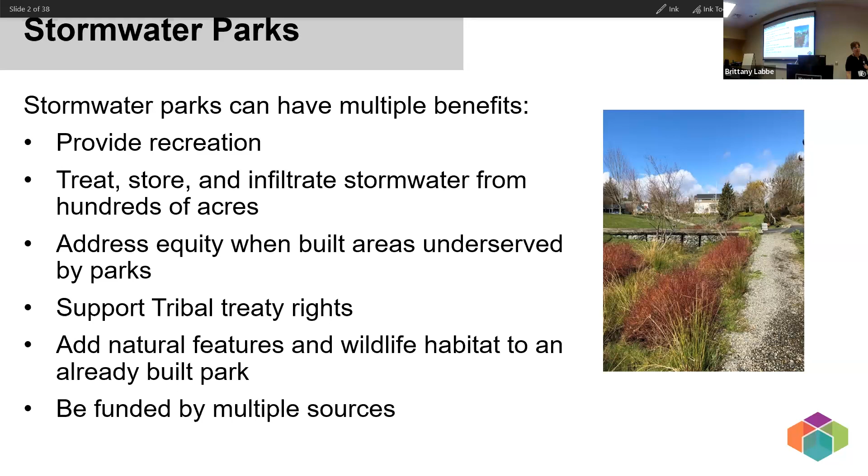So why stormwater parks? They have a lot of different benefits. You can add recreation to an area, you treat and store your stormwater. You can address equity if they're in an area that has a gap in your parks plan in terms of equity. They can support tribal treaty rights in that they're working on making receiving waters higher quality. They can add natural features and wildlife habitat, and they can be funded by multiple sources, which is always important.

And so again, the Puget Sound Regional Council has been working on stormwater parks. One of the ways they've done that is by getting a grant from the National Estuary Program to work with specific cities on stormwater parks by offering them technical assistance, and then by producing a guidance document, and also by producing a wonderful website that has lots of examples and resources.

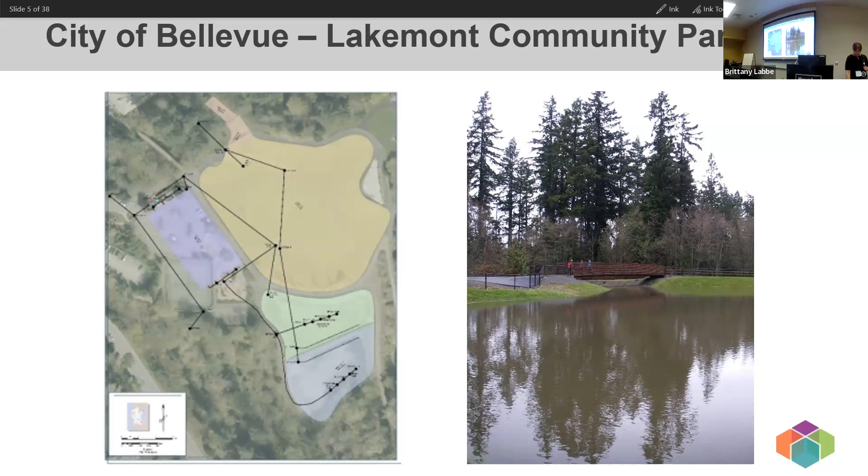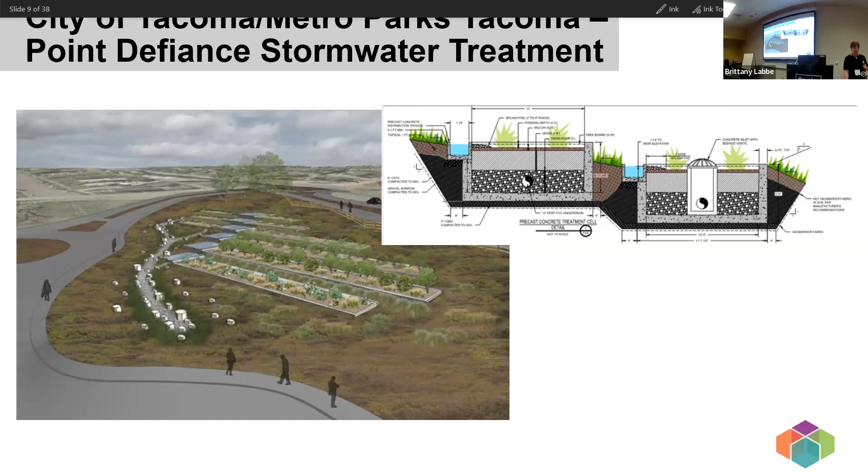Okay, so then these next slides, again, I'm going to zoom through these. So with the National Estuary Program grant, they chose cities from around the region and had them work with AHBL to get technical assistance. And that could be whatever the city wanted and needed that they felt would help move a stormwater park forward.

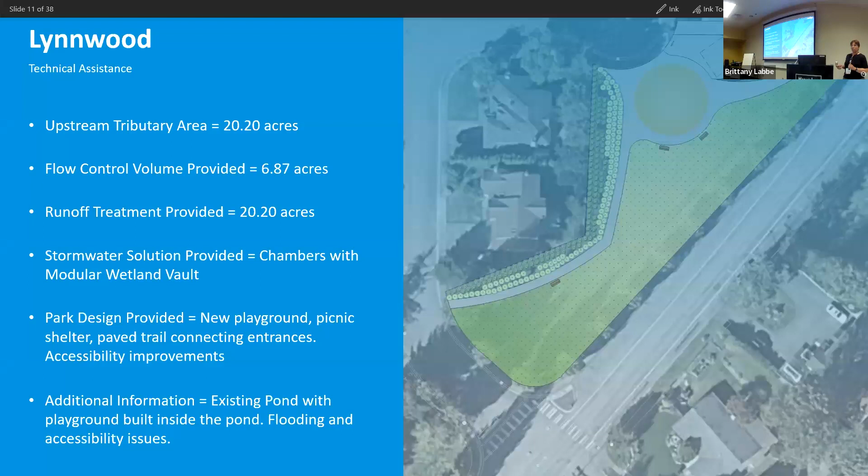And so, again, I don't feel that we have time to go through all the different details of these, but it gives you some flavor. The city of Lynnwood did an above ground facility, and they designed a park that had a new playground. So they got mostly design and sort of landscape architecture type assistance with their project. City of Marysville got sizing of their runoff treatment.

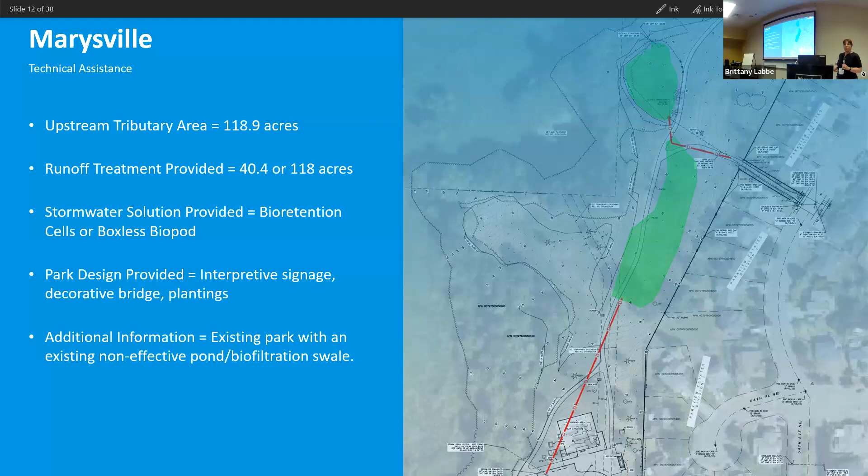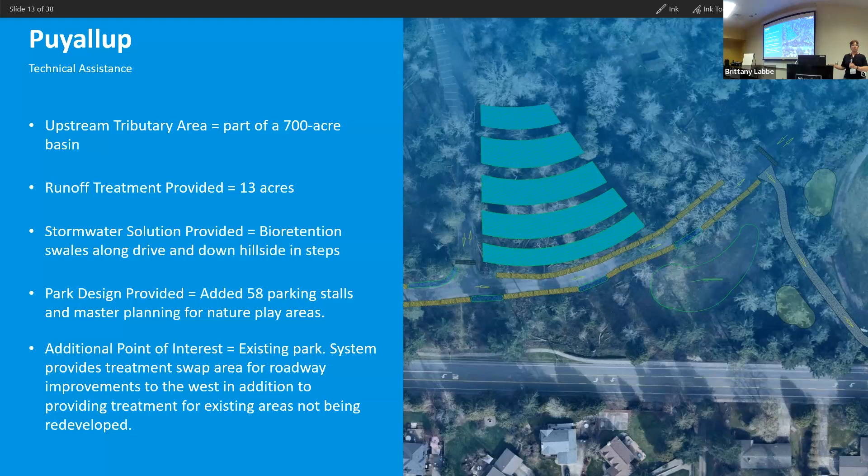Bioretention is what they chose to do. And then again, help with the park design portion of the project. City of Puyallup took part of a 700-acre basin and again developed some runoff treatment and got help again with design and putting just a something that they can then take forward towards construction and use in their public outreach. So

Woodinville, same sort of thing. There's a park that is right next to the Sammamish River, and they took an existing sort of underused tennis court and put a facility underneath that. And then again, we got design assistance and a good layout that they can then take forward.

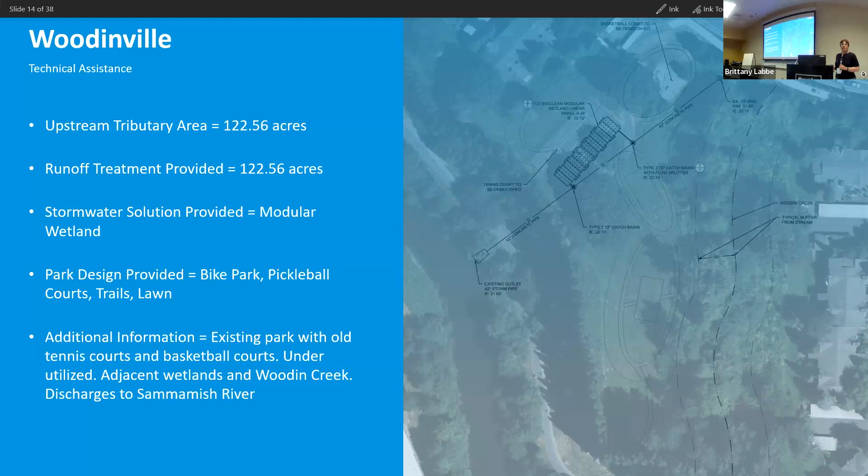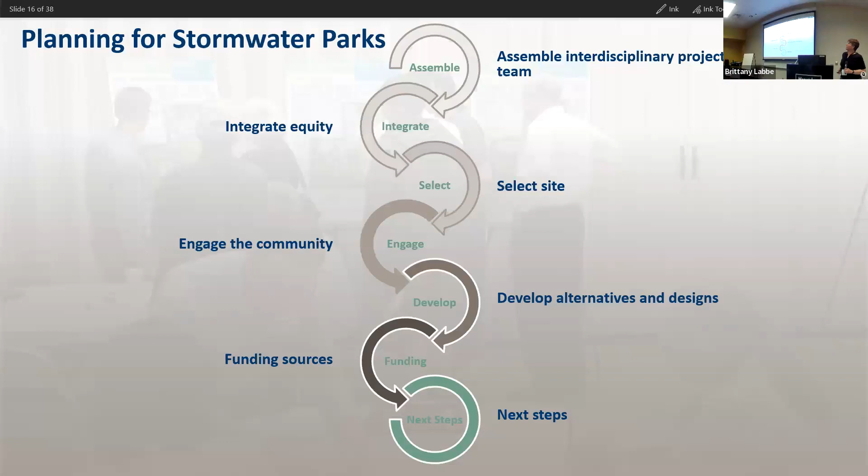So, okay. And this is the planning process, and wanted to talk about the guidance document. Again, this is available on the PSRC website, has lots of really nice tables about the types of recreation facilities you might want to consider, the types of planning collaboration that will help move your project forward. So lots of really good information collapsed into one place. So I definitely suggest that you take a look at that.

Okay, so moving on to Kirkland. Again, we participated in this grant project and proposed to use the North Rose Hill open space, which the first thing it needs is a better name. It was an open space that was in the Parks, Recreation, and Open Space Plan. And it was an identified gap area in our PROS plan. So the Parks Department said, we need a park here. And there was a citywide trail connection that goes under. There's a power corridor that runs north-south, and there was a desire for a connection through this parcel.

From the stormwater part of things, we had done retrofit planning in this area with Jacobs and had identified this as a site. It drains to Forbes Creek. We have flooding issues and water quality issues. The upstream area is all residential area that's not likely to redevelop in a way that will require stormwater treatment or flow control. About 18 acres drained to there, and the soils might infiltrate. And to top it all off, we had a storm line that currently runs through the park that was in terrible shape that needs to be replaced anyway. So from a stormwater perspective, there are a lot of reasons why it was a good idea.

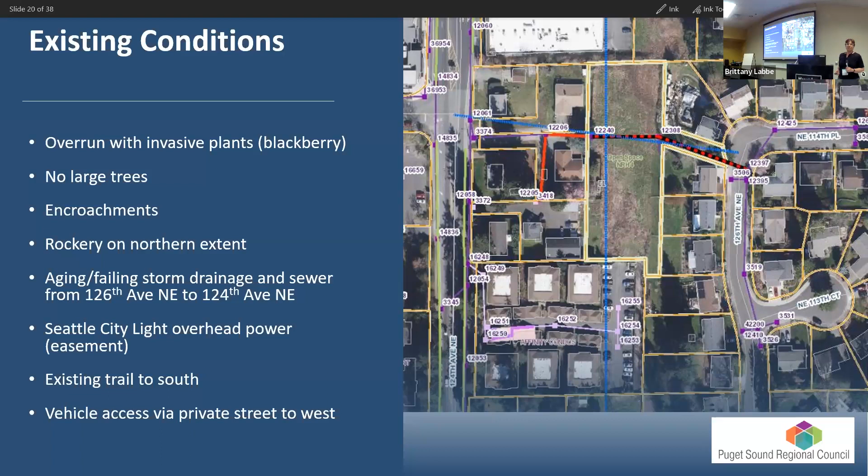So it's basically a blank slate. Here's what it looks like now. So not a lot of ways you can go down here. So a lot of ways you can go up. So we thought it was a good opportunity. And so what we asked for from AHBL was geotech. What I have found in retrofit planning I have done in other parts of the city is the more you know about your soils earlier, the better off you are.

We started off with this site thinking that infiltration would be great. The early geotech work showed us that infiltration was not feasible. So that was really helpful. That pointed us toward bioretention. We also asked for some topographic survey just to know where those encroachments are and get the lay of the land. And then we asked for some preliminary engineering and some landscape design and a little bit of cost estimating so that we could move it forward through grants and or through the parks planning process.

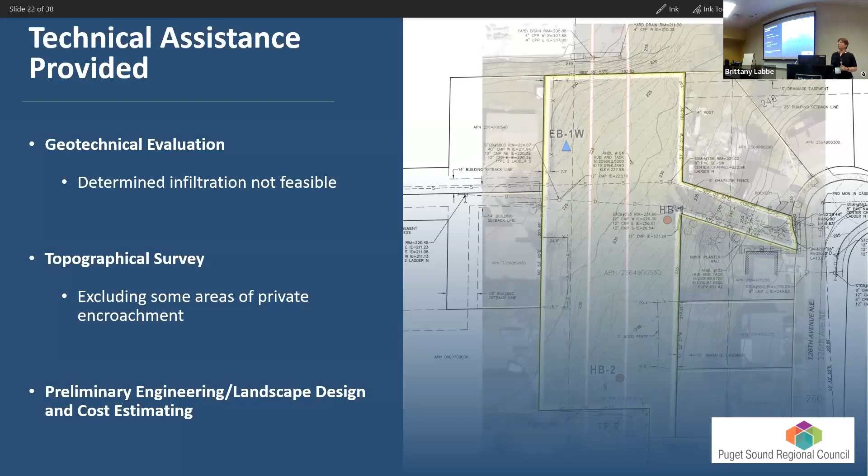And so here's what we came out with. We had some sizing via bioretention. So bioretention, putting trails, again, connecting that regional trail. There's an overlook with some benches. And then we also wanted to add some native plantings because our Green Kirkland program had identified this as a site where they wanted pollinators. And so adding native plants that could do that pollinator function was important to us.

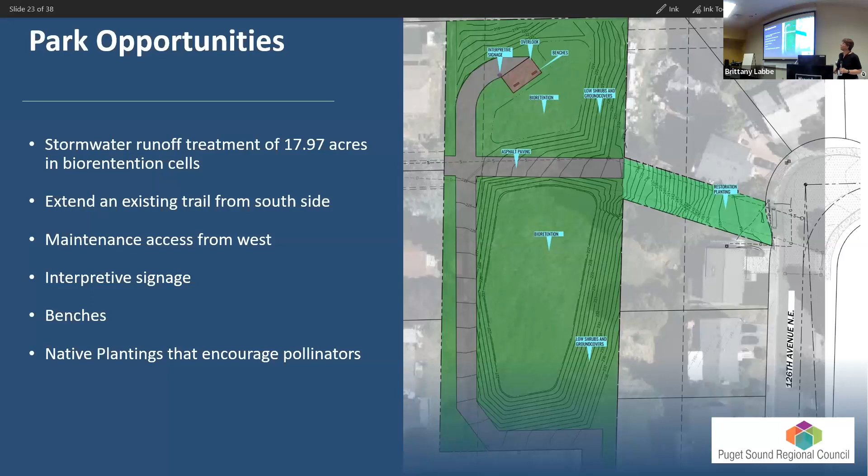So some of the lessons learned from this and other projects that I'll talk about in a second. In our city, we found that you really have to let parks lead. The Parks Recreation and Open Space Plan is a huge public outreach process, and people care super deeply about their parks and have a lot of input. Stormwater, people care about it, but they're not coming out of the woodwork to tell you about it. And so really we found that we have to let parks lead.

And actually one thing that happened during this project was that our Parks Department did a new Parks Recreation and Open Space Plan. This site was no longer a gap for whatever reason. Priorities have changed. And so now we're sort of working on that and saying, well, okay, we have a design, we're ready, but Parks is saying it's not the priority right now. So we have to honor that, and we have to really, again, just work with them.

And then the early geotech information is really helpful. And then I would say that we need to advocate for matched stormwater and park funding for reasons I'll talk about in just a sec. Some other stormwater parks that Kirkland has done. One that is just being completed now is 132nd Square Park. It takes 50 acres of upstream area and treats it, and then infiltrates it. And that has been just a fantastic collaboration.

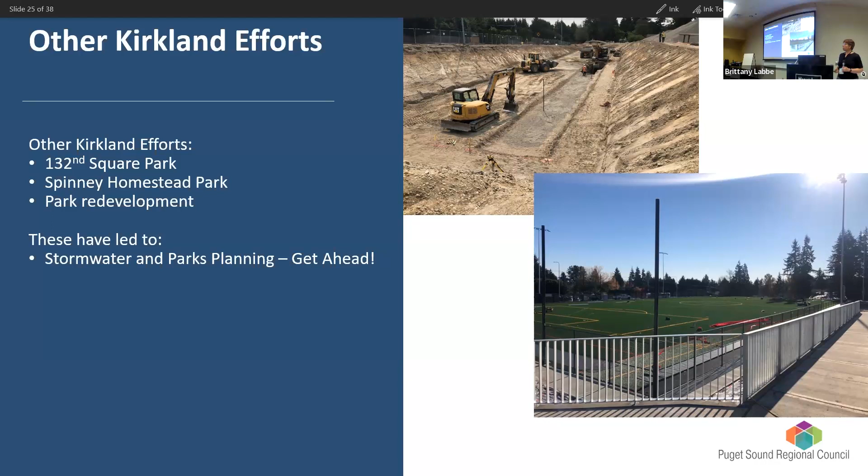And again, we had another project that we had a similar 50 acres drained to this from a stormwater perspective. We were all like, go, go, go. We talked to our Parks Department and they were initially pretty excited about it. But then again, this new Parks Recreation and Open Space Plan happened.

And it turned out that despite us stormwater people having a conceptual design and even funding, we needed parks to have time and resources to do a master plan for the park. And they didn't have that. It was no longer a priority. And so that is a case where we will have it ready. Things do change, and we'll be ready when and if Parks has the resources to do a master plan.

And so what we took away from that was that, as stormwater people, we need to be ready. So what we're doing now is we're going to look at every park in Kirkland and what are the stormwater possibilities for that park. We're going to figure out what can drain there, what type of facility we might put there, sort of do the homework and prioritize them from a stormwater perspective.

Also look at our stormwater properties, because we have some properties that have ponds on them, and say, what kind of a park could that be? And so do everything we can to be ready to respond and just sort of slot stuff in as our Parks Department is ready and willing. They love working with us. And again, 132nd Square Park has been fantastic. It's just everything has to come together. And so the more we can be ready to have it all come together, the better.

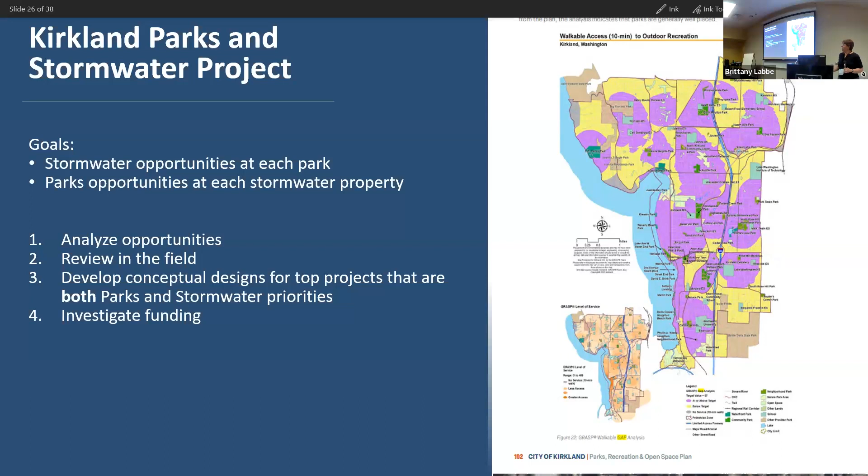So that's what we're doing now. And we're doing that by doing a combination of GIS analysis and field work.

So thanks, everybody. I really appreciate that there are so many of you in the room this late in the day. That's really encouraging to me because it tells me that you're really interested in these stormwater parks. And in Kitsap, we have been passionate about this concept for some time now. But really what I want to do today is tell you a little bit of the story of our own stormwater park journey and how we got there.

So Kitsap at one point in time, as probably many other jurisdictions do, really was focusing on addressing drainage, right? I mean, long ago, that was the problem that we were all trying to solve.

But about a decade ago, we had some really forward-thinking elected officials and management in our organization that said, hey, rather than just treating drainage as something that we need to get rid of, why don't we look at this in a more holistic way and really shift our focus and thought process from just addressing that problem to creating a solution for sustainable growth.

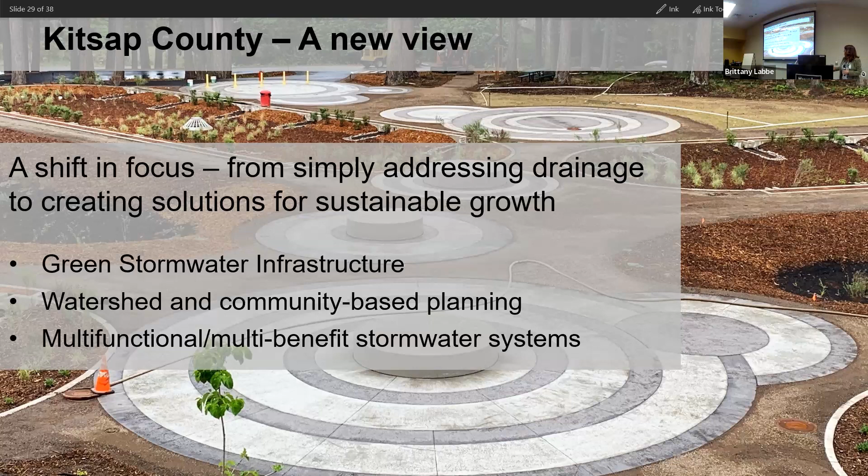And we had a lot down there really close to the water, right upstream of that outfall. And we said, hey, we need to get in there and do something. Maybe we'll go in and we'll put in a pond. And our community said, let's bring this to a screeching halt. Heck no, we do not want that. This is right in the middle of town. It's the first thing that you see as you set out in front of that beautiful view. There's a small little park down there that had some value to them that everybody was really vested in. And they really balked at us doing a project like that.

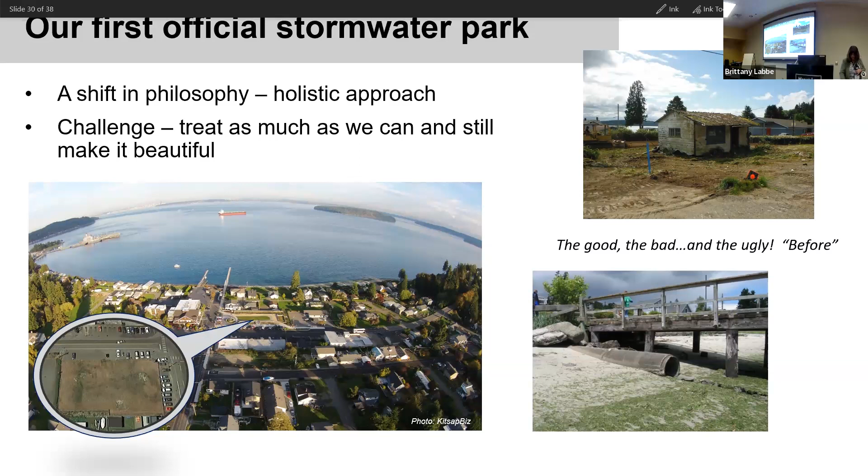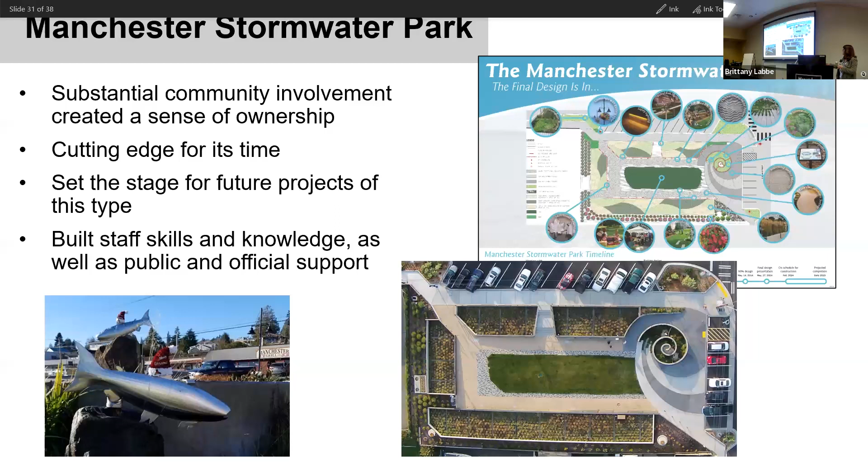So just pointing out a couple of the things that I found really significant out of this process that we were able to do. Down on that left-hand side, this is not just a park that treats stormwater. This is a park that incorporates stormwater art. This is a park that incorporates safety lighting, which is one of the things that they asked us for. They said, don't make this a little dark corner where people can hide out and do vandalism or whatever. We want to make sure that we've got lighting.

So we put in benches, we put in lighting, and it's all in the same theme of water that ties that whole park in together. We obviously have our cells, which is performing the function that we need it to. But then the last thing that I wanted to show you on this one that I thought was really cool is that over Christmas, that Christmas tree in the middle, they asked us for a port in the center of that grassy area where they could put their Christmas tree and plug it in. So we were able to do that for them.

They have their annual Christmas tree lighting down there every year. They have flea markets. They have 4th of July parades that center around this park. They have outings, and there were 1,000 people in that little tiny park over Christmas for their Christmas tree lighting. So that to me is a really big success.

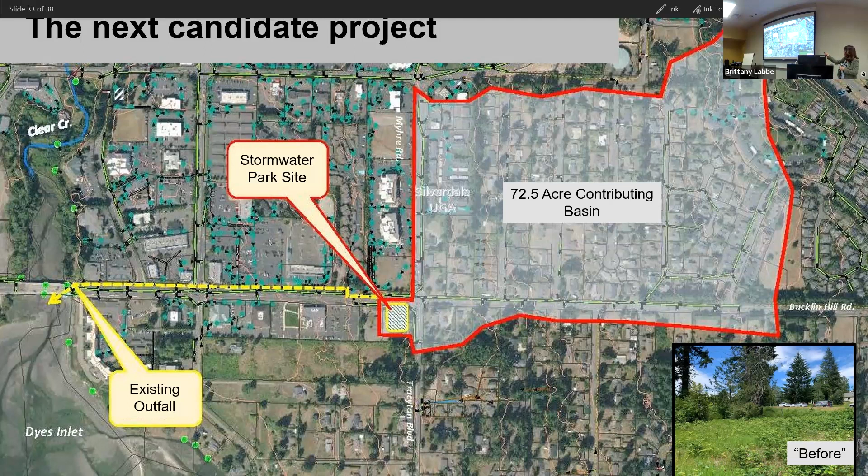It's all a mouthful really for doing just essentially what we've done in a couple of other locations. So this is a very exciting project for us. One of the other pieces that's really exciting about this is that we have a brand new equity atlas that we're using to determine where the best bang for our buck is as far as environmental justice in Kitsap. So we ran this project site through that equity atlas, and what we found was this particular site is in the most diverse area of our jurisdiction.

And what that means is it's within a 1 mile radius of 5 of the top 8 most diverse census tracts in unincorporated Kitsap. And all of our top 8 most diverse census tracts are located within a 2 mile radius. So this neighborhood to the northeast of that site doesn't really have a little park to use. The nearest park facilities are quite a ways away. So we're creating space and green space for a location that didn't have it before.

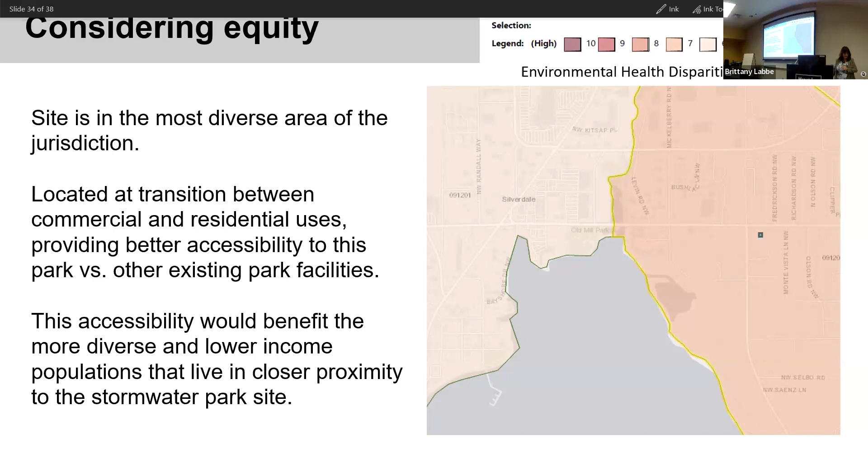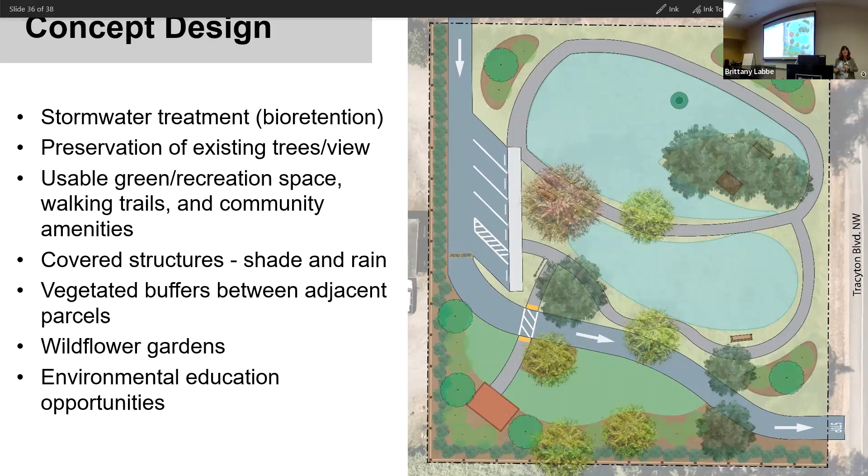It's got our stormwater treatment, which is what we want. It also has things like usable green space and walking trails and vegetated buffers between the adjacent parcels that are owned by homes. So I mean, it's hitting on a lot of the things that we feel like are going to make it more accepted in the community and adopted, hopefully, and loved.

So here's my challenge to you guys. You heard a lot about how to figure out the technical aspects of it. You saw a lot of really big facilities on a large scale, a large expensive scale. And what I want to tell you is they don't always have to be that. They can be that, but they don't always have to be. So there is more than one way to skin this cat.

And then finally, when you're doing these thought processes and these plannings for the future, look forward, not just at the problem that you're solving today, but start to think about the problems that you could solve in the future. So is it the urban heat island? Do you need to add some trees into a location? Are you looking at climate change impacts? What are those small pieces that you can work into a project that's going to have lasting benefits down the road?